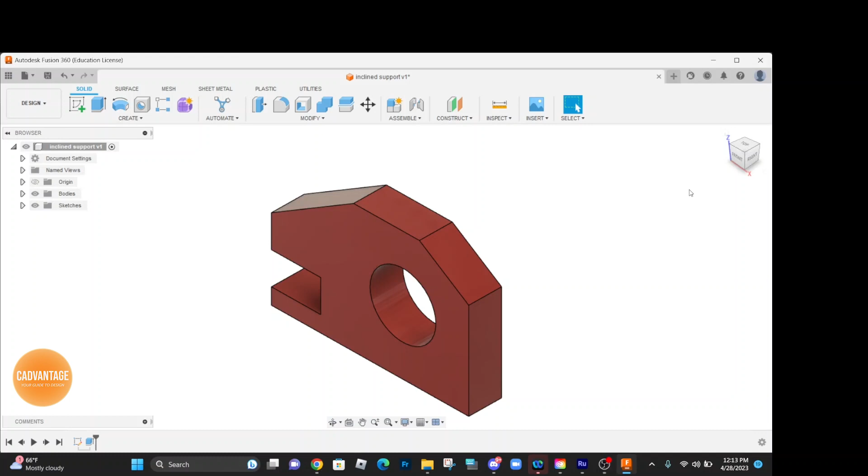In this video, I'm going to show you how to create a simple solid extrusion for the inclined support. These are the dimensions in inches. Thickness of the support is 0.5 inches.

So I'm going to start off with a new design in Fusion, and I'm going to click on File, New Design, and Units. So I am going to click on this triangle right next to Document Settings and change the active units to inches. And I'm going to click on OK and start my first sketch.

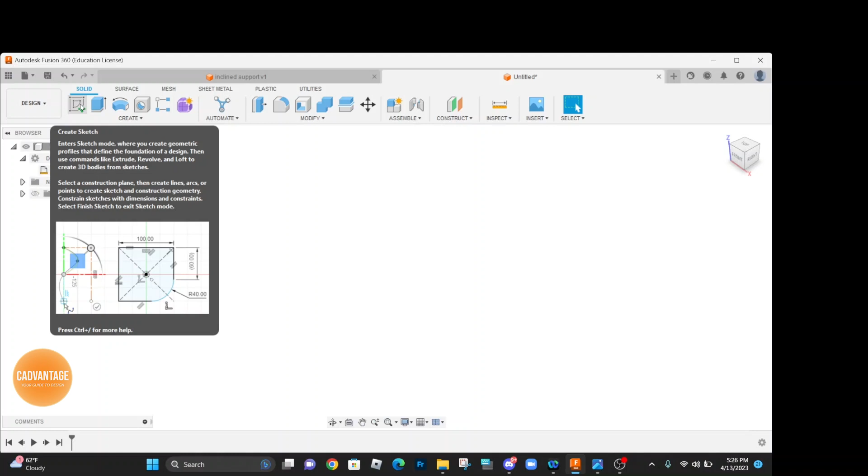So the thing is to first create a two-dimensional sketch, add the dimensions and the constraints as needed, and then extrude it for the thickness. The thickness here is 0.5 inches. So starting the sketch, I'm going to create a sketch. To enter the sketch mode, I'm going to click here. Next thing is to pick a plane.

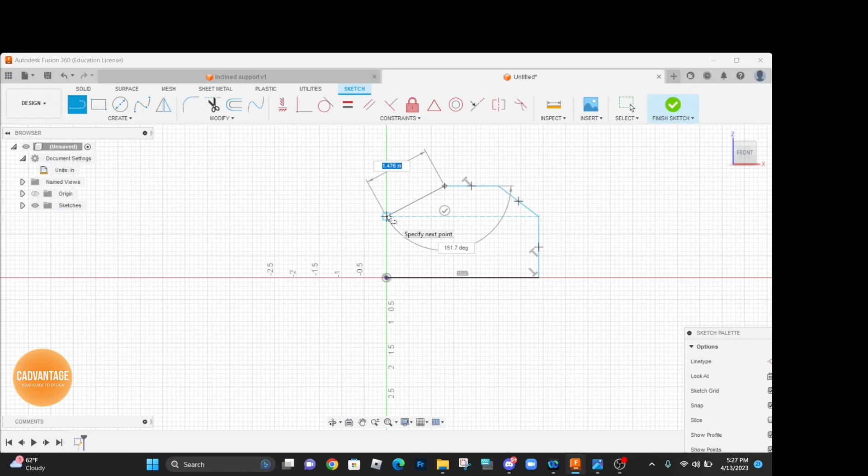So I'm going to click on the front plane, and here I am in the front plane, and over here on the ribbon now I have these tools to help me create a sketch. So I'm going to pick the line tool and place my first point at the origin, and roughly I'm going to create the geometry. The shape is matching what I intend to draw here, and go all the way and come back here and hit enter, and the shape matches.

Now let's talk about constraints. So what constraints do is they help you get your design intent right. So if you notice, this line is not horizontal here, but in order to do that, all I need to do is click on my horizontal constraint, click here, and now the line is horizontal.

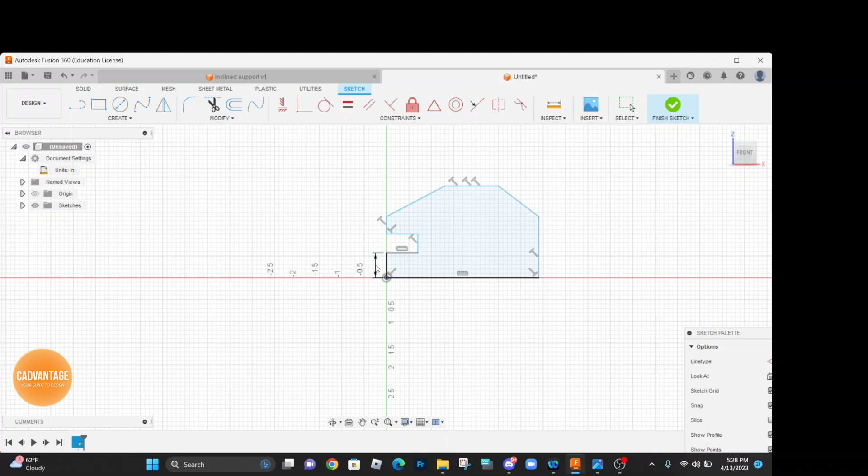Next is to place dimensions. Now as we place dimensions, some of the geometry may change, and we will again use constraints to help with our design intent. So you want to come here first, and in order to start dimensioning, you are going to use the sketch dimension tool, and click on this line, and the dimension there is 0.25, dimension here is

0.75, and so on. And from here to this point I have 1.25, and oops, my design intent just got disrupted. These two lines, this line right here and this line right here, needed to be aligned so that they are in the same line. So when I added dimensions, some of the geometry shifted.

So to get it right again, I'm going to click here on the collinear constraint, and what that will do is help the two objects, this line and this line, come together in the same line. So click on the collinear constraint, click here, and you have it to where it was intended.

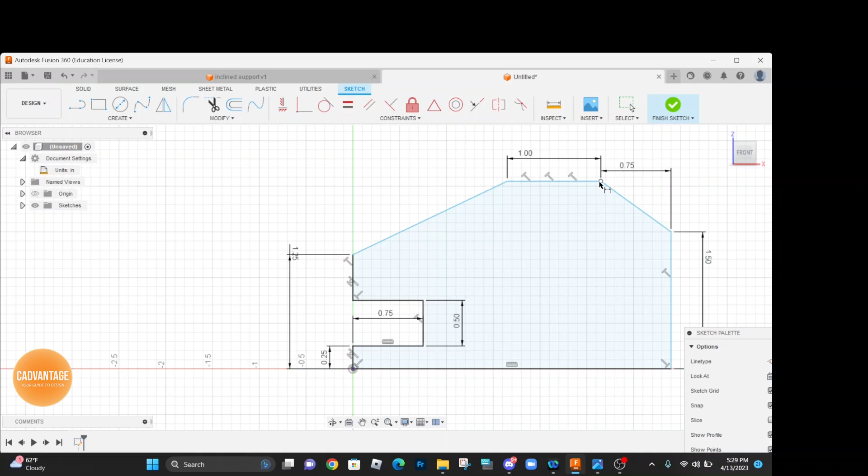Let's go back to sketch dimension, and this right here is 1 inch, this is 0.75, this is 1.5, and from here through here I have 2 inches, and then of course this is 3 inches. And now my sketch is fully defined, and I still have to draw that circle in this area.

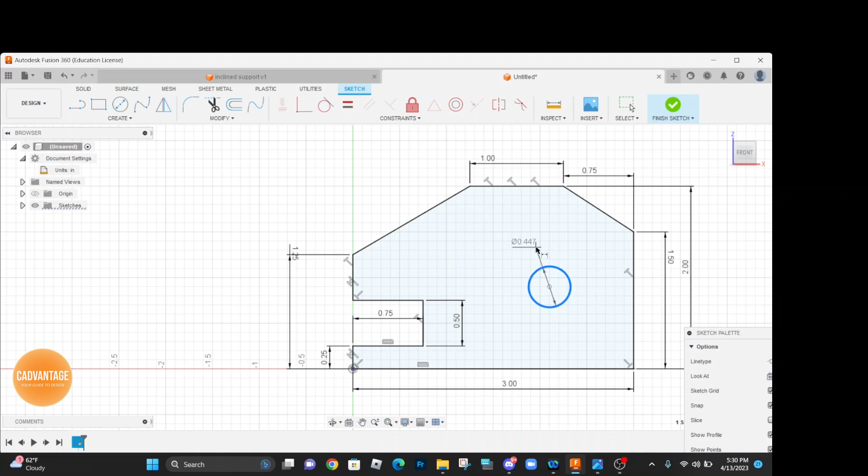So I'm going to go with create circle, and I'm going to pick circle with center diameter, and I'm going to click somewhere here, and then use my sketch dimension tool again. So my diameter here is 1 inch, and I have a distance from this point until this to be 1 inch, and also from here to the center of the circle I have 1 inch again. So my sketch is now fully defined.

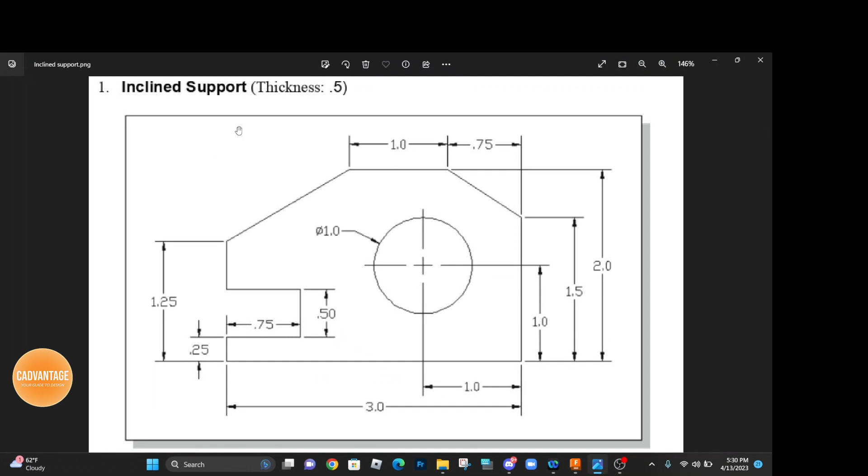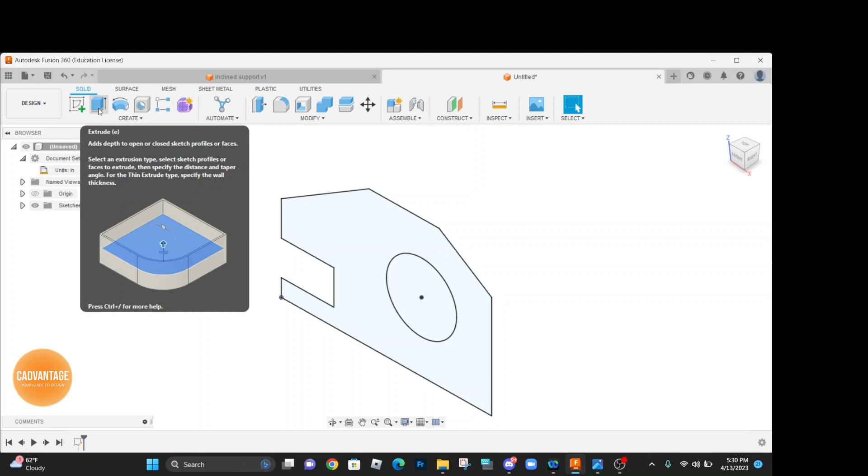I can look again, check to make sure that everything is right. And now since we are all done here, I'm going to go ahead and click Finish Sketch. I'm going to click on this home view icon and get back to my isometric view. Now for the extrusion. So let's go ahead and click on Extrude to add thickness to this closed sketch. So click on Extrude and this Extrude window pops up.

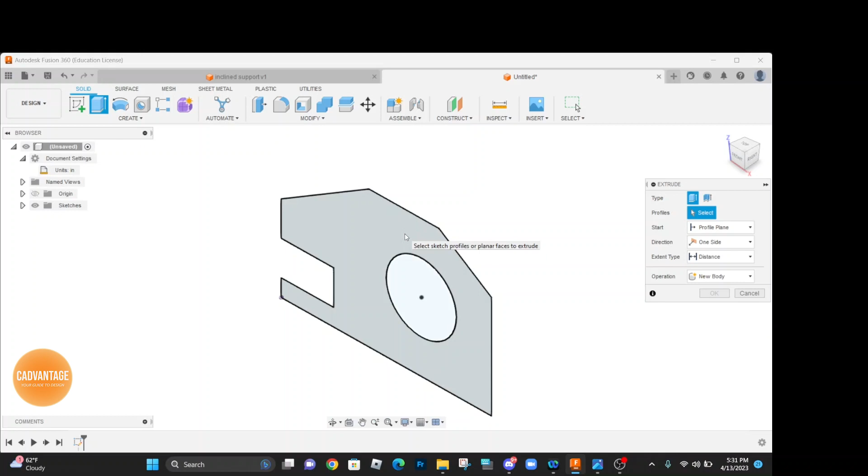For the operation, you have new body. You have several other options here, but I'm going to stay with new body. Direction, you can, first I'm going to select my profile. So I'm going to select this profile. So this is the region that is between this shape right here and the circle that we created. So I'm going to click on this profile. This is what I want to extrude.

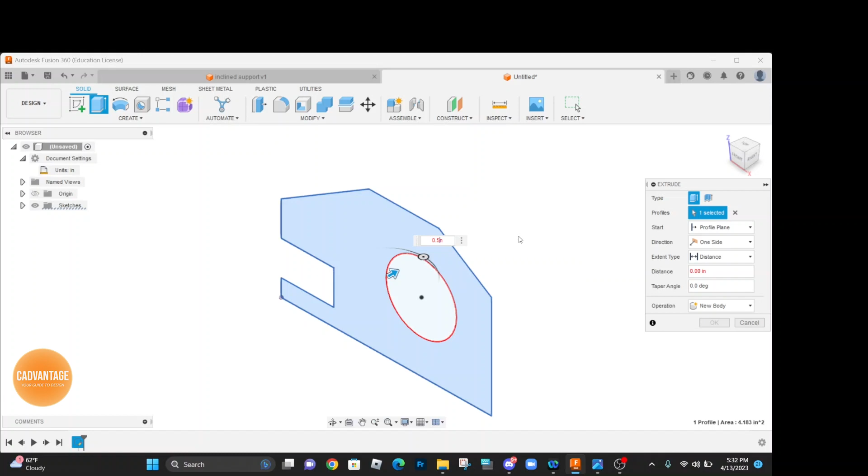Direction, you can go one side, two sides, or symmetric. So what symmetric does is that it creates identical extrusions on each side of the profile plane. Two sides creates a unique extrusion on each side of the profile plane, and one side of course on one side of the profile plane. So we go 0.5 inches for the extrusion and click OK. And there it is, the inclined support is created.